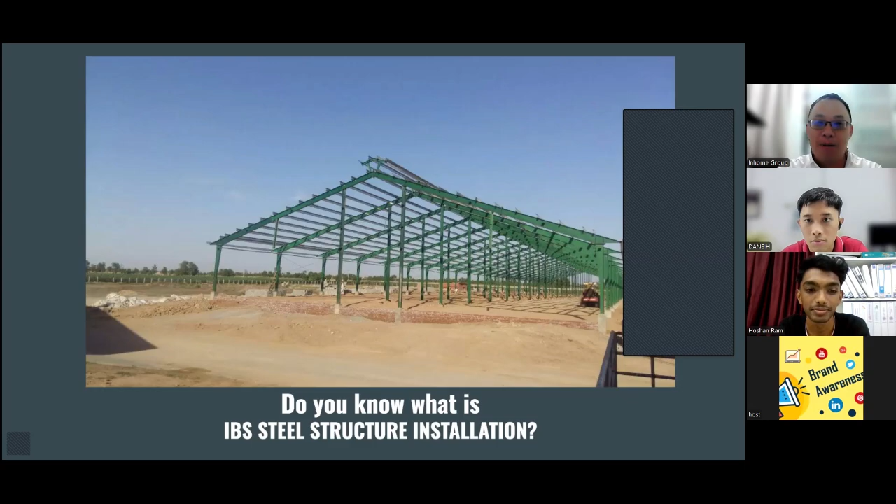All right, we'll move on. IBS steel structure, what is it all about? But before we really go into it, we are having our learning aim for today.

Here are 4 learning aims for the IBS steel structure installation course. Today we'll go through 4 elements. First, we call it enhanced installation accuracy. Why so? Because we need to equip participants with the skill to interpret technical drawings and be highly precise in this industry, in the installation technique, to ensure structural stability and compliance with IBS standard.

Second, improve installation efficiency. We need to teach you guys to optimize the process and best practices for managing time and resources during installation to reduce delay and improve productivity.

Third, strengthen safety awareness. Always remember, safety is very important. So we instill a strong understanding of safety protocol, hazard identification, and the use of appropriate personal protective equipment, also called PPE, to prevent accidents during installation.

And foster team collaboration, develop teamwork and communication skills to improve coordination among installation crews, ensuring smooth execution of project and adherence to deadline. Because we are doing a project, we need to really have cooperation in every party so that the whole thing is more smooth.

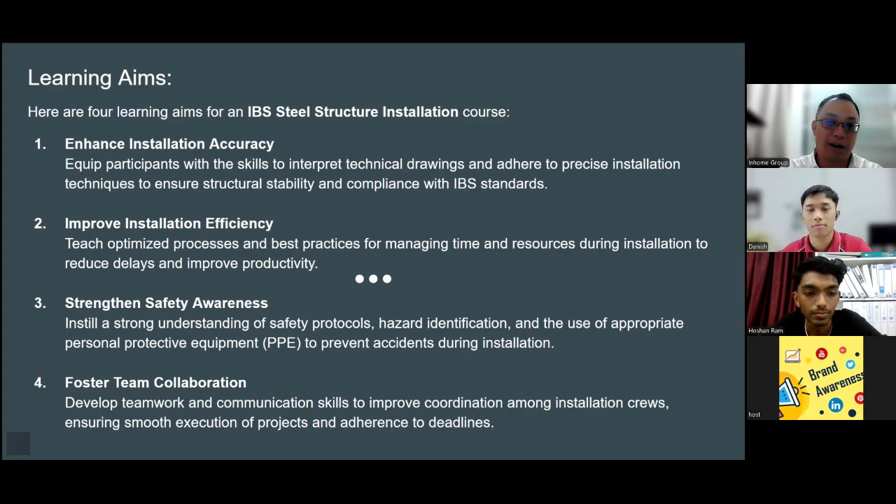Okay, next we're going into details by these 4 learning aims of the day, step by step. First thing, we enhance installation accuracy. How do we enhance the installation accuracy?

First thing, we need to understand the technical drawings, because we need to train you guys to really know how to read the drawings clearly, focusing on key details like measurement and symbols. Because if you do not identify the measurement, the symbols, the dimension, or the structure detail, it might cause the collapse of the structure, which is very dangerous and a critical problem for all the places.

And of course, we also have the skill to identify specific structure components like beams, columns, joint placement, and understand their correct positioning and orientation based on proofing instructions. Without this, it will create a lot of haywire, up and down.

Second, or point 1.2, we call it use precise techniques. So we need to teach you guys the accurate method of aligning and assembling steel components to avoid errors.

Because we need to assemble the steel component during the construction, you guys need to train using the industry standard tools and methods that ensure accuracy in positioning and fitting structural elements. If you do not do the actual precise technique, it will affect your whole structure, it will come out looking weird and not like a proper form of the structure.

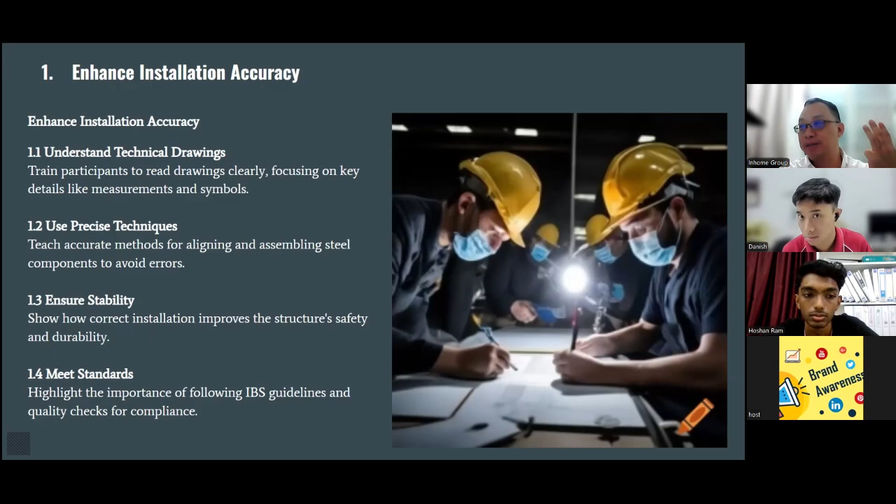Why so? Because when you're building up the building, the base is very important. So when you have the base, make it really solid, and then after that you put up the column, you put up the beam, you put up the joint, everything has to be step by step. You cannot overlap one step with another step, because then the whole thing will not fit together and you cannot build it.

You also need to plan step by step: after you do the landscaping or the floor, you come up with the structure. You need to work along and collaborate with the electrician, sewerage or water supply, firefighting system, and all other things. You need to allocate the schedule to make sure the whole build schedule is on time. That will be time management.

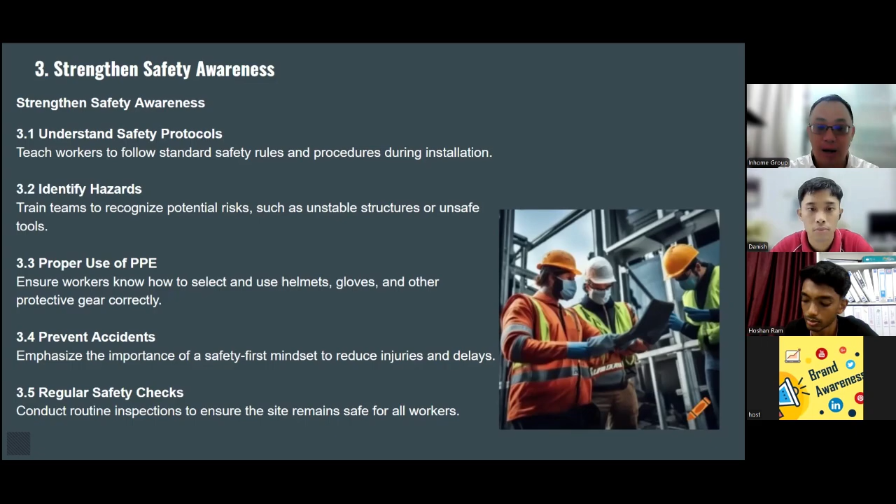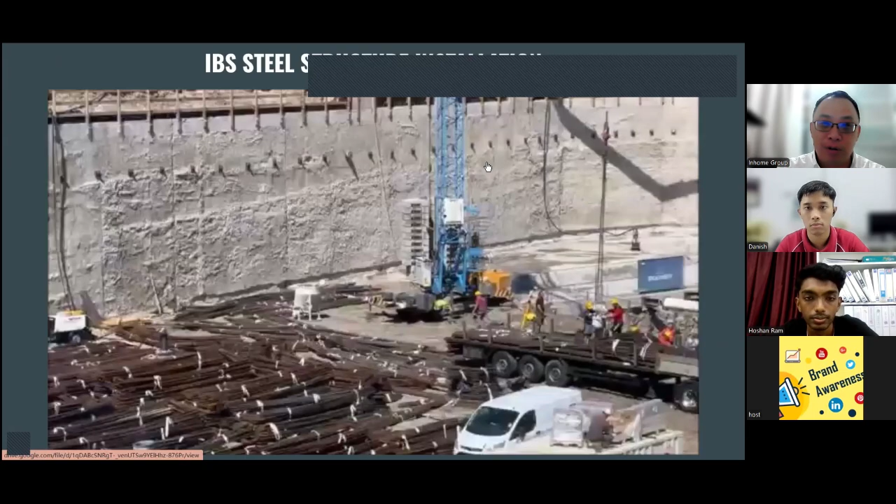Okay, so this one I need to show you, IBS steel structure installation. What is this? Having a moment, I will change this one. Share another screen with you guys, the videos, a very brief video on what IBS steel is all about. Okay, so, very short video.

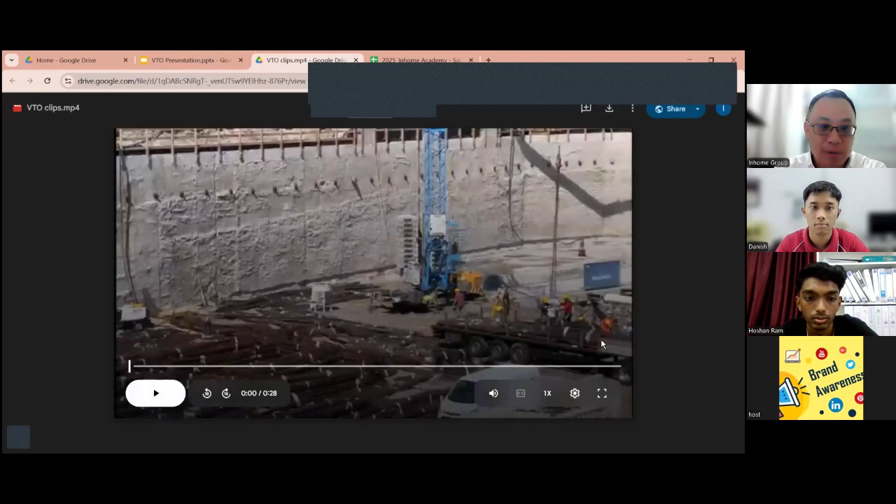Construction site with workers handling steel structures. Accurate installation is crucial for the safety and stability of IBS steel structures.

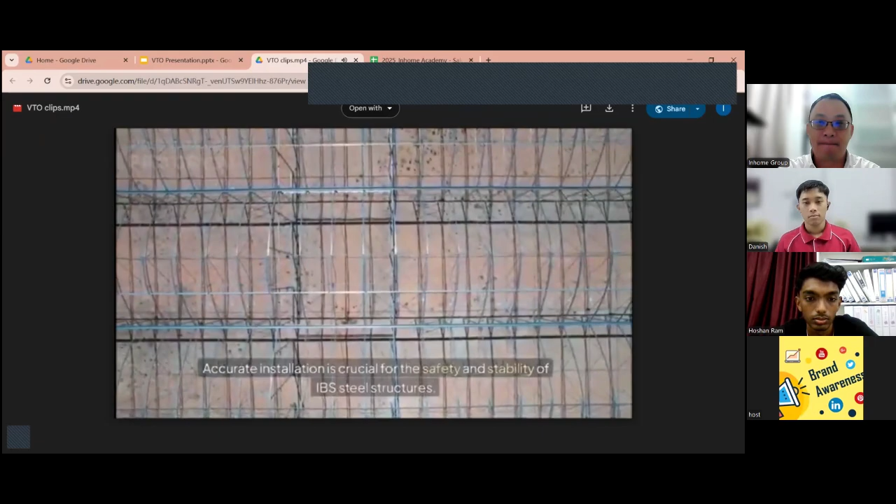Engineer reviewing a technical drawing on a tablet or paper. Learn how to read and interpret technical drawings with precision.

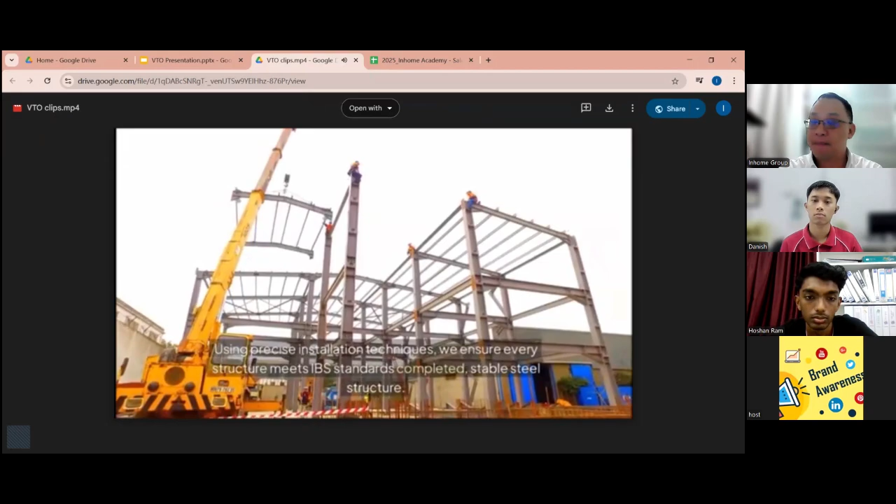Team aligning and bolting steel beams correctly. Using precise installation techniques, we ensure every structure meets IBS standards. Stable steel structure, structural stability and compliance with industry standards.

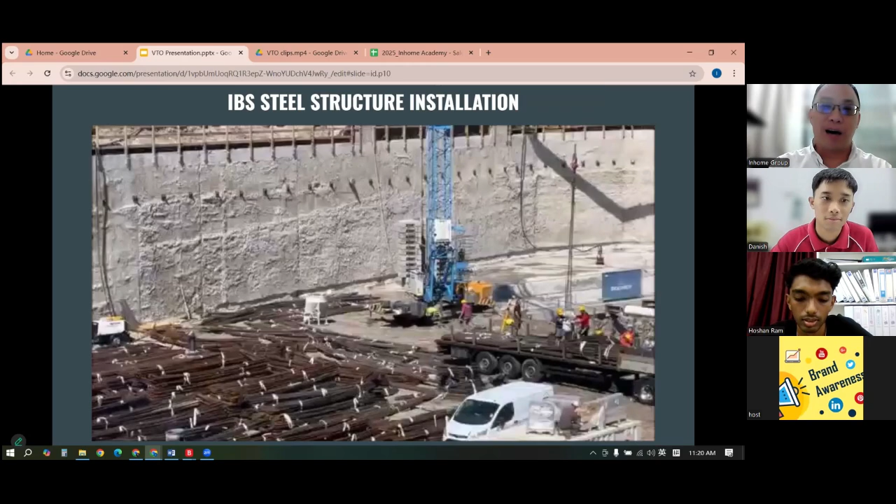Okay, so now the next one after my presentation, so many information that I actually shared with you. Now I'll actually give away an information sheet for you guys. You may take about 5 minutes to have a read on this.

What is IBS steel structure installation requirements? Okay, this IBS steel structure installation. Five minutes.

Inside the information sheet, basically we will share what I shared just now, all the information. We put inside the details all the necessary information that you all need to know and understand. Enhance installation accuracy - inside there's 4 points, so you can read thoroughly into it.

Then after that, our second point, improve installation efficiency. There's 5 points over here: optimize processes, time management, best practice, reduce delays, boost productivity.

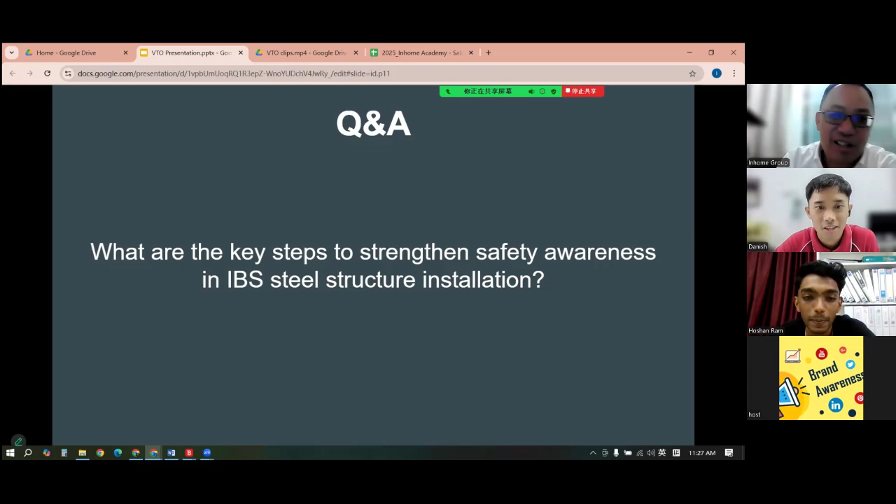Strengthening safety awareness in IBS steel structure installation involves regular safety briefing like proper PPE usage, ongoing training, strict adherence to SOP on equipment inspection and hazard reporting, and active supervision. This is all the safety awareness that we need to always keep track of.

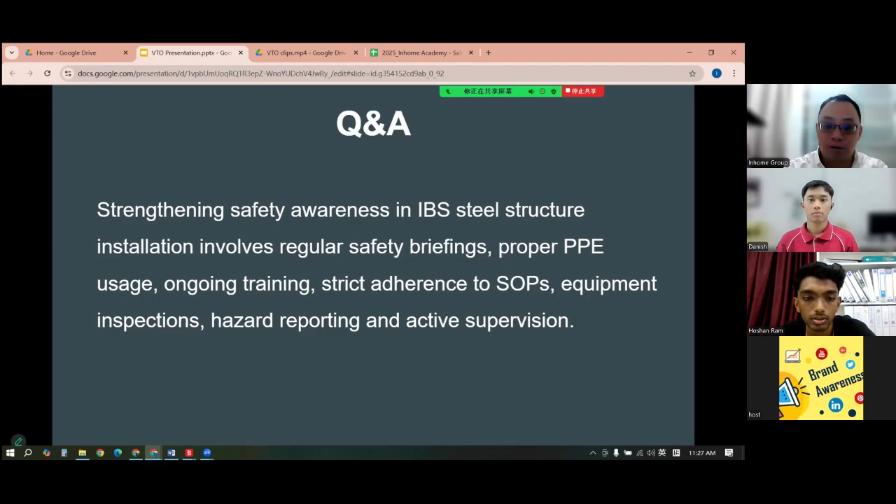All right, okay, so after that we'll be giving you the assignment sheet. Inside the assignment sheet there's a few questions. I'll send it over to you and give you 5 minutes. Inside there's only 5 questions.

Just pick very quick, it's ABCD - basically it's choices. Okay, so you just do the objective, make it done. I'll send out the assignment sheet for you guys, so now you do it.